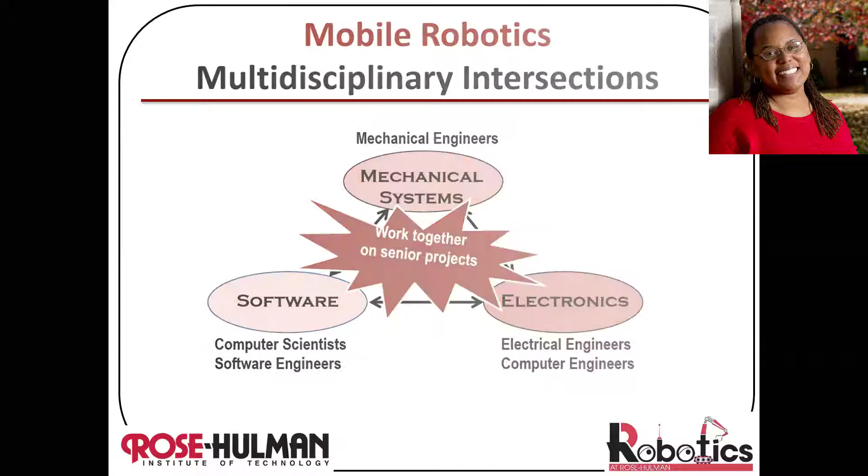So we look for external clients for our senior design so that they're not just getting that pretty project that the professor made where they already know the answer and they're just giving you hints to get there. So I wanted to share a little bit of the way we do robotics at Rose-Hulman at all of our levels.

I'm going to show you a snippet of a video from our freshman engineering design class, a senior level mobile robotics class with all of those disciplines together, as well as some work from one of my graduate students. So here's the first one from our freshman competition.

Welcome to the Monster Mash.

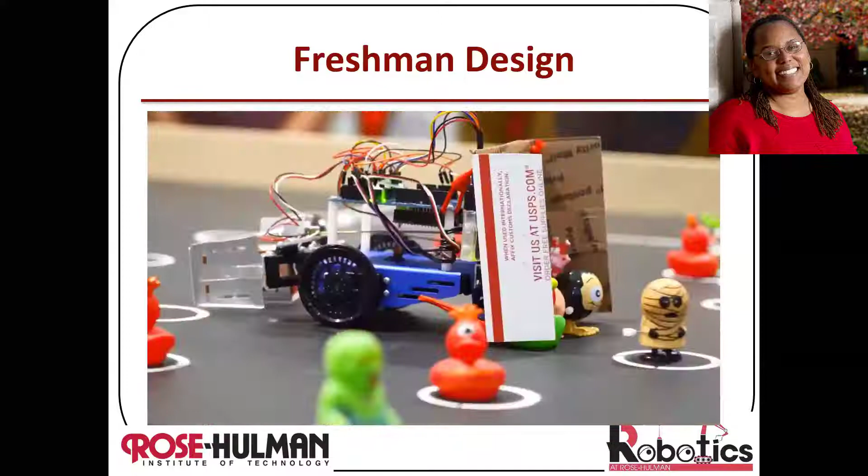What we like to tell our students is whether you are interested in robotics or not, I can show you something on that robot that would interest you. If it's coding, if it's mechanical systems, if it's motors, if it's sensors, if it's controls. That's the ideal thing about integrating robotics into different courses in the curriculum. If it's microcontrollers, if it's embedded systems, I can show you that.

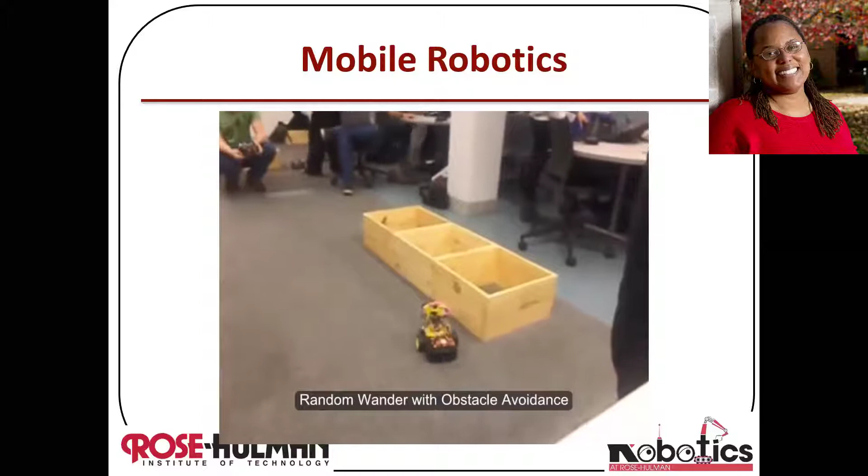That class I just showed you was made of students who may not necessarily be in robotics. But this is a required course for our mobile robotics class. This is an exercise where the students selected a different robot than the one I was teaching the class with, because they never think my robot is good enough—they're so tied to what they see on TV and they swear that's how robots work in the real world.

In this video, this student had his own robot and he wanted to prove to me that he could do everything I was requiring the class to do with his robot. So that's what this video is made of.

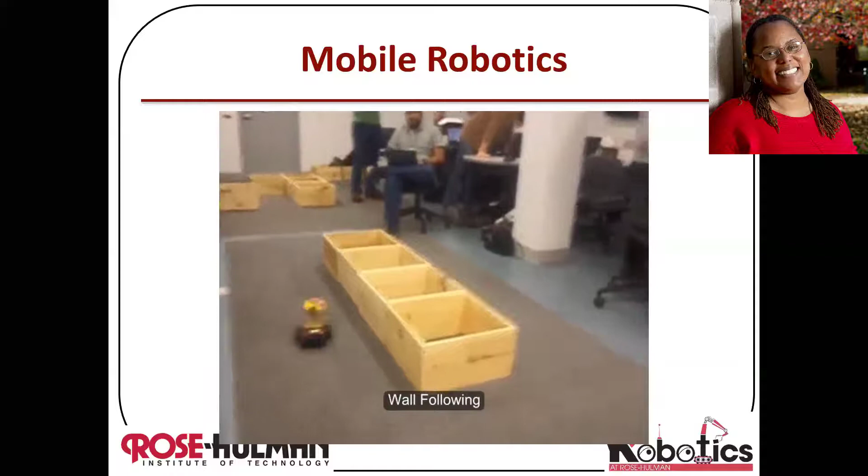This class is about control architecture. Their goal is to take the robot from a newborn baby to about the ability of a 3-year-old by the end of the class.

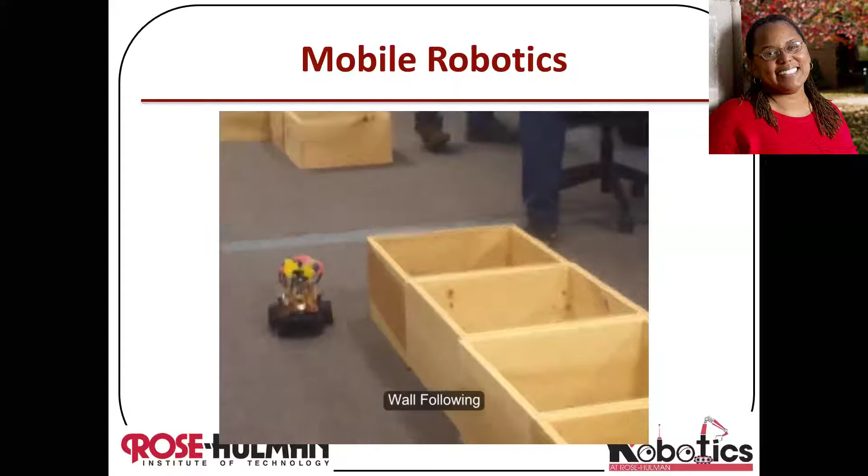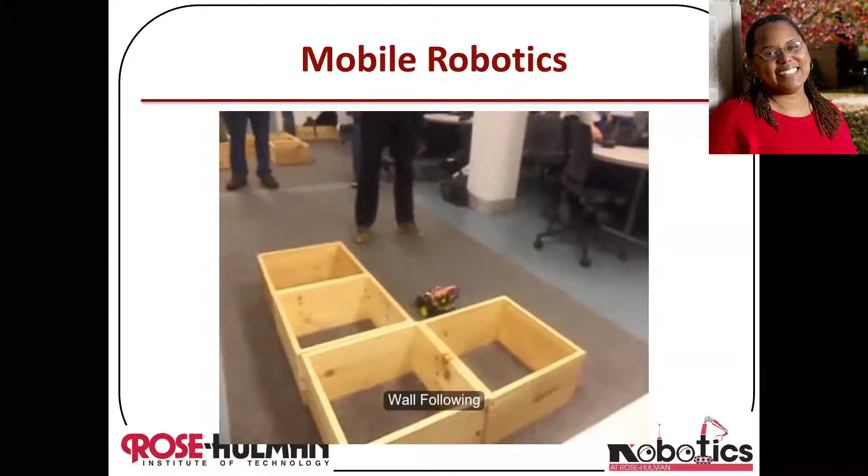This video shows him building up the robot's intelligence, starting with potential fields, obstacle avoidance, to PD feedback control, wall following, then showing me that the robot can recognize when it loses a wall or when there's a wall in front, so it can navigate in and out of corners and doors.

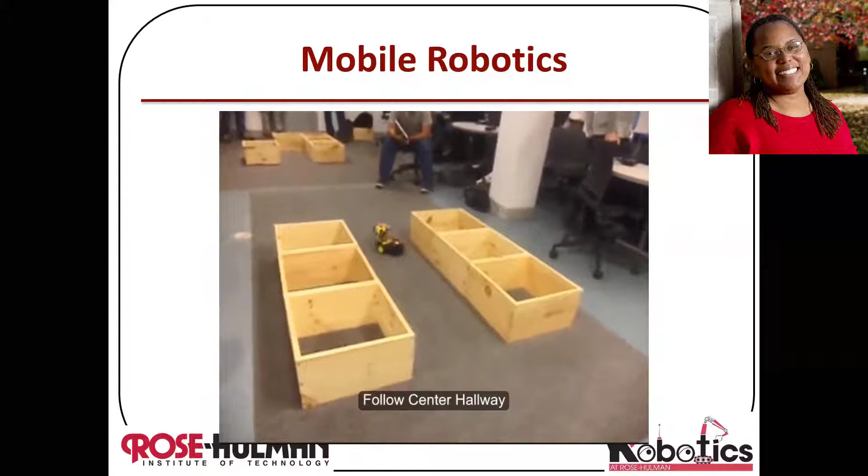And then moving on to doing things like, does it recognize it's in a hallway, but can now center itself? All of this is done by using PD controllers. Now, once again, we're talking about some students who've never taken a controls course. I've got students in the class who are mechanical, electrical, computer science, and software engineering. They've got to learn things they've learned in their siloed department courses as well as things they have not.

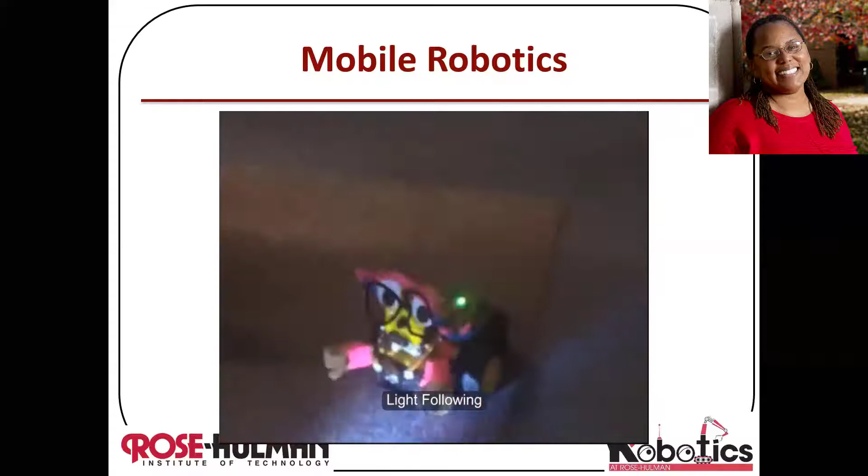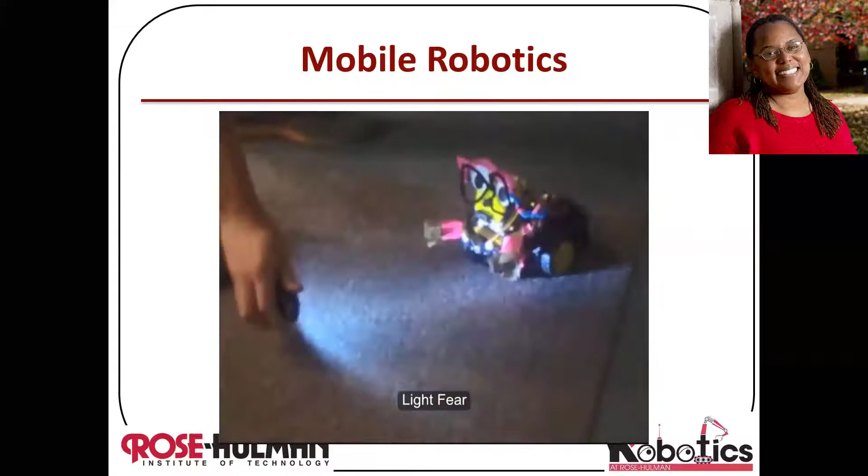We also do Braitenberg vehicles. So they look at the different types of vehicles, such as love of light, fear of light, aggression towards light, avoidance of light, etc. So here they're showing me that they can change the robot's behavior and how it responds to light, so that they can then build this on a state machine to make choices.

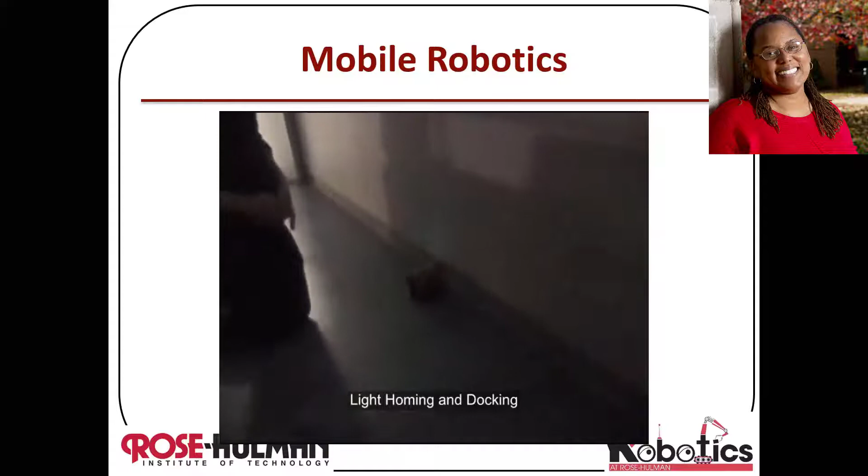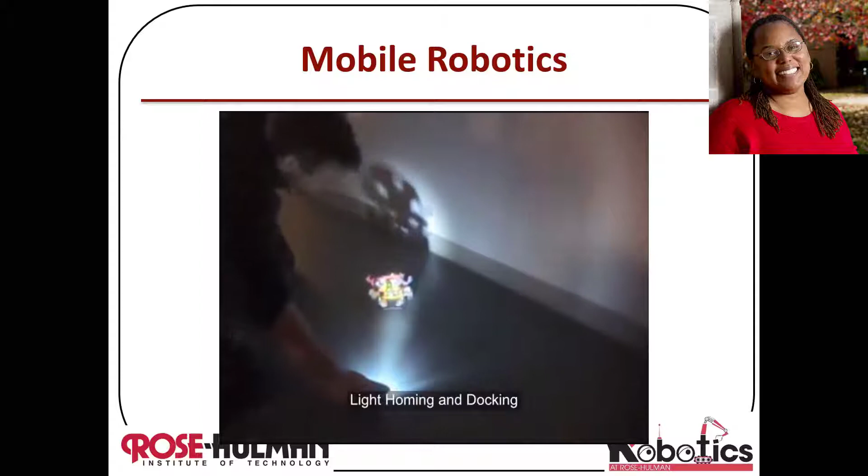So this is an example of hybrid control, where the robot is doing behavior-based control on light following. It's also going to use that path planning level, so that it recognizes the priority is now to get to that light, but it now has to plan its path back to the wall to determine where it left. So they're showing me that they can now build a state machine on their robot so that it can do these different behaviors as well.

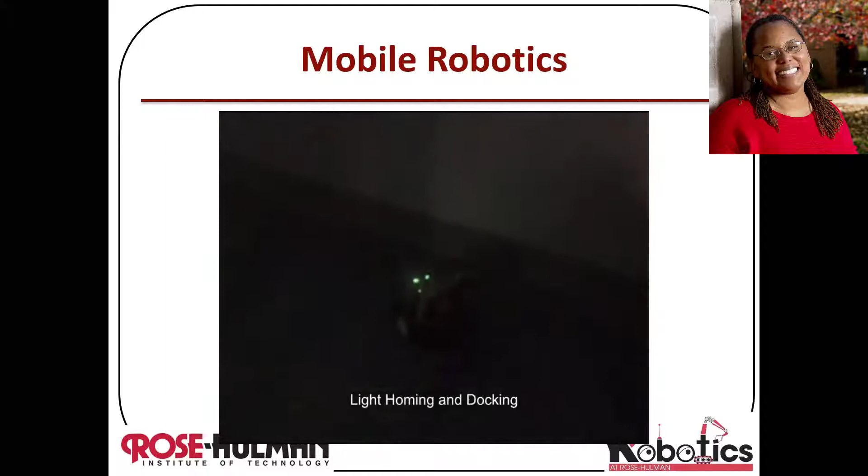This course always ends with path planning, mapping, and localization. And the CS students always get excited about this because they can now show me that that A-star and D-star stuff that they learned in their artificial intelligence classes actually can be done on a robot.

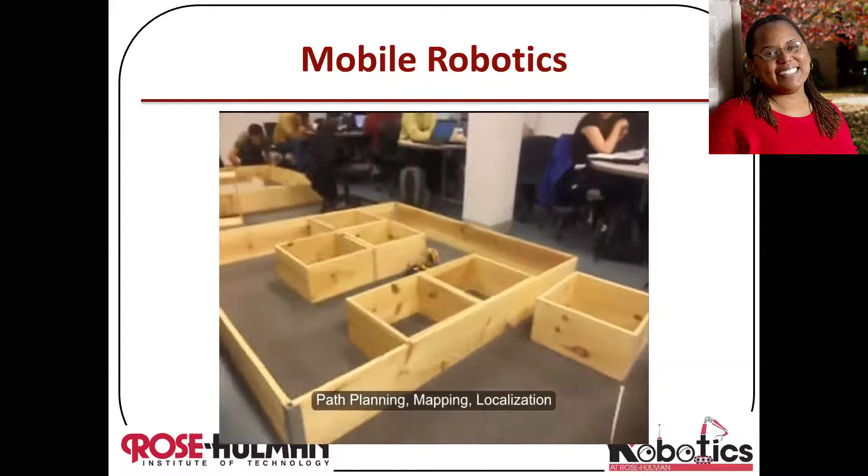And the thing I love the most about this, I don't do anything. In fact, I'll be honest with you, when I first gave these assignments, I didn't even know it was going to work. My main thing was I wanted the students to, I didn't get to do it when I was an undergrad. And the class has now gone so far beyond what I could have ever imagined, that this last year, I actually had them make human-robot interfaces to virtually design ways to engage with their robot, and they were able to figure that out.

I have one more video, and then I'm going to be done because Ayana put me on a time limit.

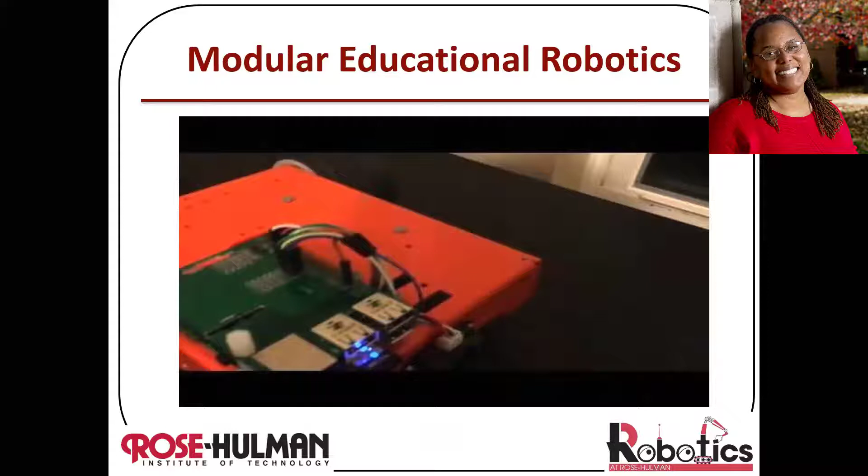So I only have had very few grad students, but this is one I wanted to share with you because I have students every year that tell me how much my robot sucks. So I said, well, build me a better robot. So this one student for his graduate thesis built me a better robot. He built me a robot using all of the garage spare parts from all of the 5 generations of robots that we had thrown out in my class, and showed that he could design a modular robot that could be coded in whatever you wanted and in whatever language you wanted.

So he showed that you could program it on a computer, a cell phone, an iPad, on the cloud. And then he's demonstrating that he could do all these behaviors on it and that you could make it plug and play, so that now this robot could be used in my mobile robotics course, and I don't have to worry about that a CS student doesn't know controls, or that the electrical engineering student is not that good at coding, because they now have the flexibility of language, whatever language they want to use and whatever platform they want to use.

So I just want to wrap up by saying that the great thing about mobile robotics is that you can show the intersections between all of these disciplines. And because people from 9 to 99 get excited about a robot, you can also use it to diversify the profession by showing them how it can connect to what they do in their everyday life.